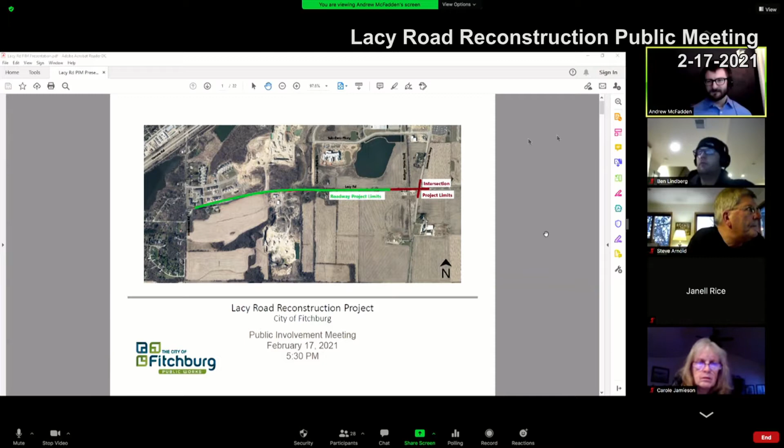So this is the Lacy Road Reconstruction Project. I'll give you a quick agenda: we're going to be talking about the limits, the need for the project, goals and schedule, and then we'll work through the layouts, typical cross sections, and go down the corridor to give you a flavor of the specifics of the corridor design to date. Then we'll give you information about the project website and how to give us feedback.

Originally, through the CIP process, this project was slated as one. We moved up the intersection project and the Lacy roadway project, all the way up to but not including Fitchrona, to be constructed next year in summer 2022, and we're currently working on the design for that. I won't really be talking about the Fitchrona intersection project tonight; that'll wait until 2023 design and 2024 construction.

If you have questions related to that, feel free to voice them, but we're going to be mainly focused on the roadway project, which is a little bit more than a mile long, and the intersection project, which includes Seminole Highway and the Badger State Trail.

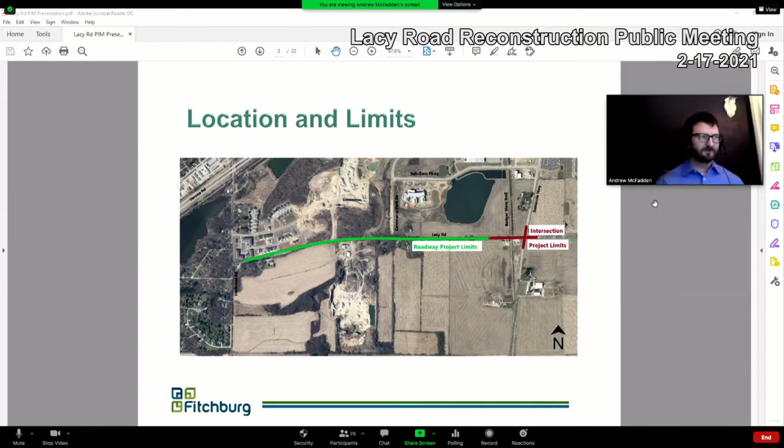So what was the need for the project? Why improve Lacy Road? There were existing long-term operational safety needs that need to be addressed. We also wanted to accommodate city growth and redevelopment along the corridor, and there were some discontinuous pedestrian and bicycle accommodations we wanted to fix.

The vertical and horizontal curves along the roadway didn't meet adequate sight distance for the 50-mile-an-hour road it previously was. The final design will bring the roadway curve down a little, tapering off some of those horizontal curves, and in the end lower the speed limit to 35 to make these safer so you can actually see over the curve and spot an obstacle in your way. That was one big part of the project.

In terms of the project vicinity growth, there's a lot of development around this area - the Quarry Vista, Stoner Prairie neighborhoods, other proposed development, and new industrial park development. So we want to make sure we're accommodating that and urbanizing the corridor to accommodate the future growth.

From the discontinuous pedestrian and bicycle accommodations, as you can see here, there are a lot of great facilities: the Military Ridge Trail, the Badger State Trail, some on-street bike lanes, a path adjacent to Rock Ridge, but not really anything connecting the two.

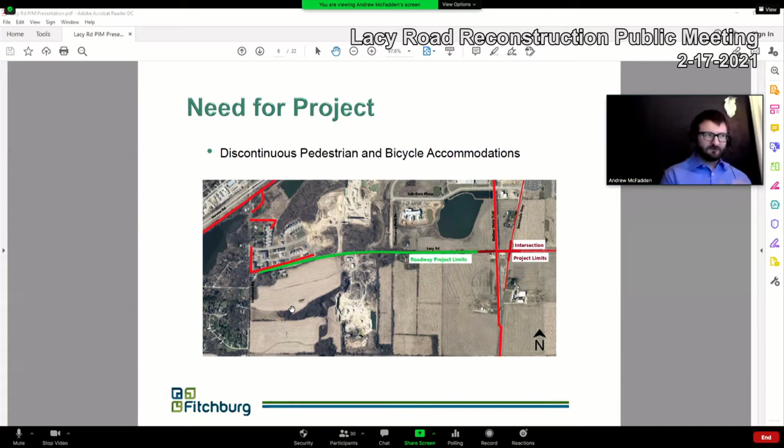This project is really slated to provide potentially that connection between these two areas for pedestrians and bicyclists, as I'll demonstrate here. So with the project goals, to do that, we're going to continue that multi-use path.

We've proposed a 10-foot path along the north side of Lacy Road, and we'll also be installing buffered bike lanes along both sides of the road. As part of the intersection project near Seminole, we're looking at enhancing that crossing treatment for the Badger State Trail.

Along with the intersection project, we're looking at increasing the intersection capacity to withstand the increased traffic volumes for the next 25 to 35 years, and looking to accommodate that future growth.

We also look to treat the stormwater. We have two basins in this project, an east and a west, and we wanted to build and extend our facilities to be able to treat that water before it gets into the kettle or the other basins.

Additionally, we really want to try to minimize our right-of-way acquisition and the impacts to neighboring properties, and keep our footprint as small as possible and minimize the impacts to the corridor during construction. So just to give you a quick overview of where we're at.

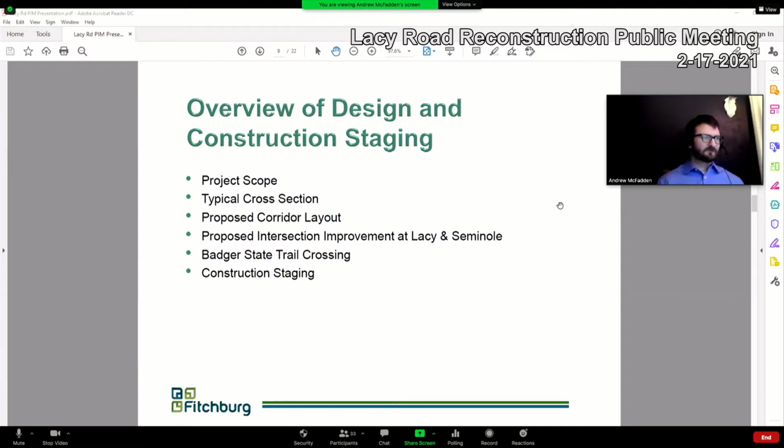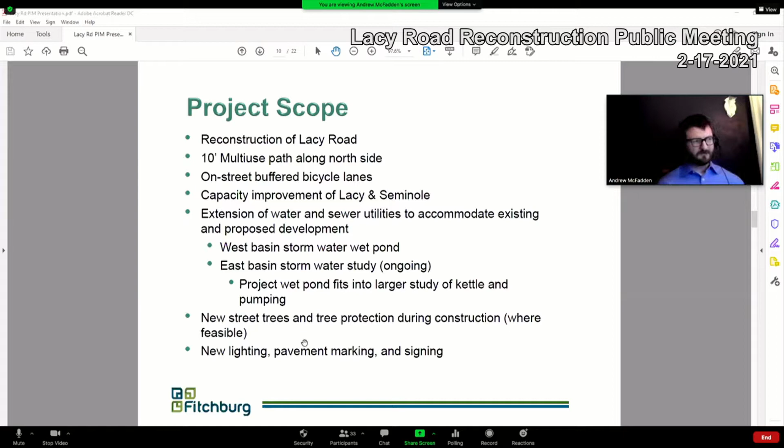As I said, a 10-foot multi-use path on the north side, on-street buffered bike lanes, capacity improvements at Seminole. We have two wet ponds we're looking to put in, one for each basin, and we're extending the water and sewer utilities to accommodate the existing and proposed development. We're also adding street trees and providing street tree protection during construction where feasible, plus new lighting, pavement markings, and signing along the whole corridor.

Along with that, we have a couple different kinds of sections. We have some portions of the corridor where we'll be providing medians, shown below. So let's walk through the elements.

Starting on the south side, we have a 5-foot sidewalk, an amenity terrace or amenity zone, buffered bike lanes, 12-foot travel lanes, the median, and then the inverse on the other side with a terrace and a 10-foot bike path.

We also have some areas of the corridor where we won't be putting in medians, shown here, where we'll be narrowing it down.

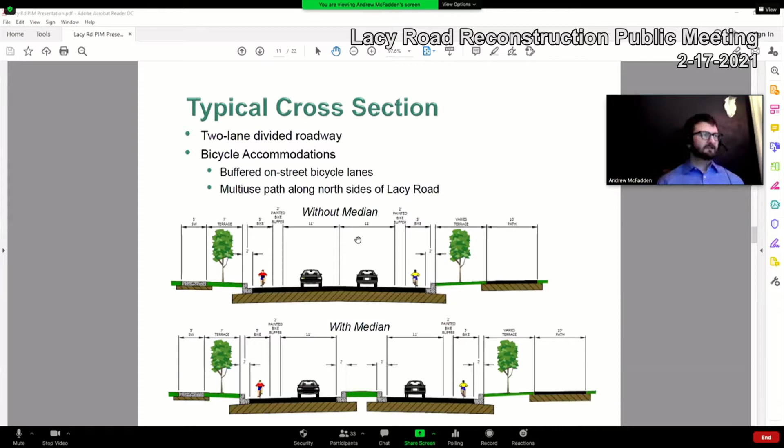Just zooming in on this—we'll be putting all of this up on the website. I know this is a lot of information, but feel free to dive into it more if you have specific comments on it.

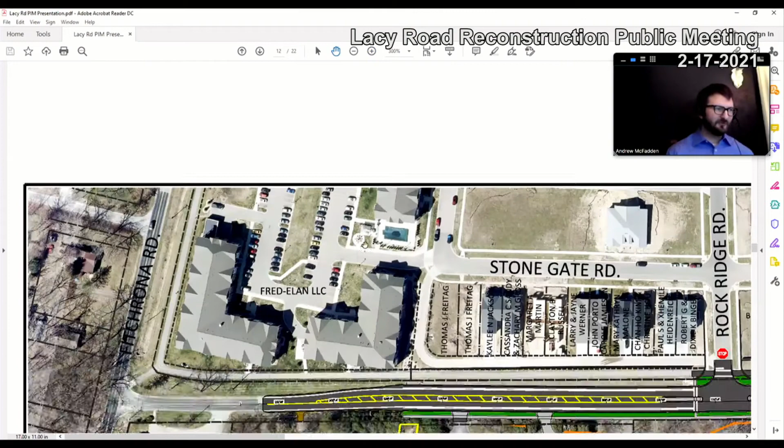Starting on the western side, as I noted, the project does not include Fitchrona Road. We start roughly 250 feet east of Fitchrona Road, so we'll match the existing cross section there, and then we'll widen.

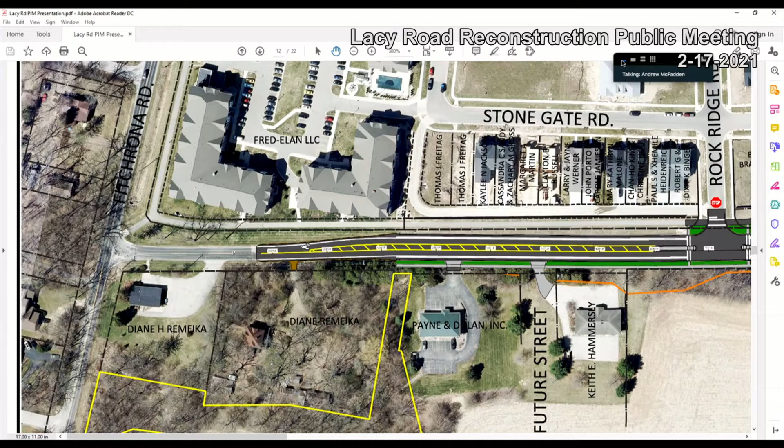I'll give you a quick lay of the land. This orange line is the temporary limited easement, where we're looking at potentially grading just during construction, but that would be done after that. The yellow is for our wet ponds—those would be the permanent limited easement. And then we also have some pink where we have proposed new right-of-way, and then existing right-of-way with the property line.

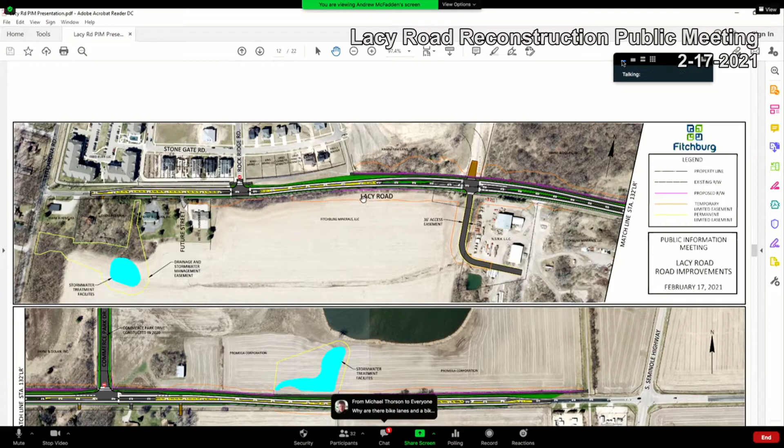So I'll just walk from west to east, looking through some of the key features. Don't worry, we'll come back to this—I'm sure you'll have lots of specific questions. As you can tell, walking along, we'll be putting in curb and gutter along the whole corridor.

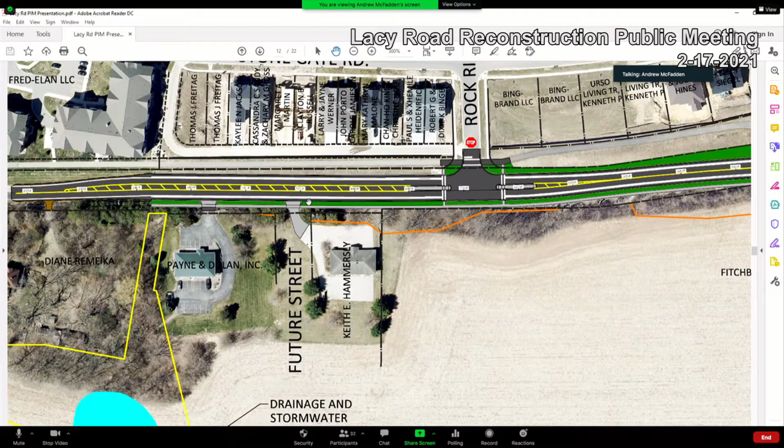Reconstructing driveways, with stop controlled intersections here at Rock Ridge. Moving further east, we'll be putting in driveways with access easements as necessary.

Here's a flavor of what the medians would look like. We'll try to incorporate grass as much as possible.

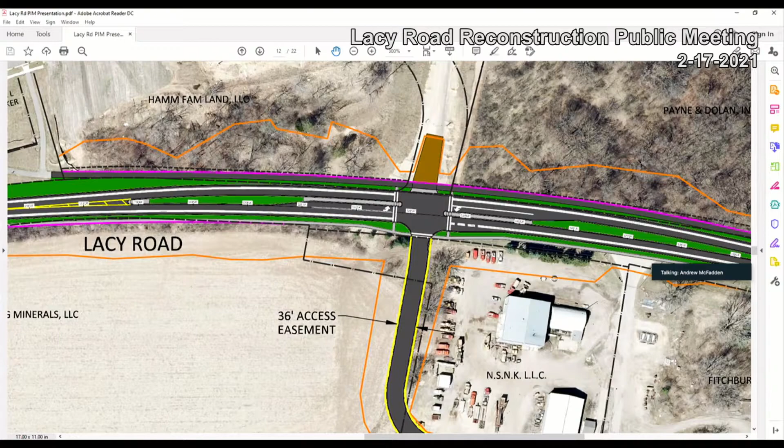Working further east, we'll move down here. This is the connection with Commerce Park Drive that will be completed as part of this project. Just going to buffer, sorry.

It's a big file, I appreciate the time it took to get all the line layers on this. So, zooming in just a little bit.

Again, reconstructing these driveways. This is a median section with a right turn into Commerce Park Drive. This is the eastern stormwater facility, the wet pond.

We do have some left turns proposed into a future property that could be going in here. That's kind of to be determined, but we have that flexibility baked into the design.

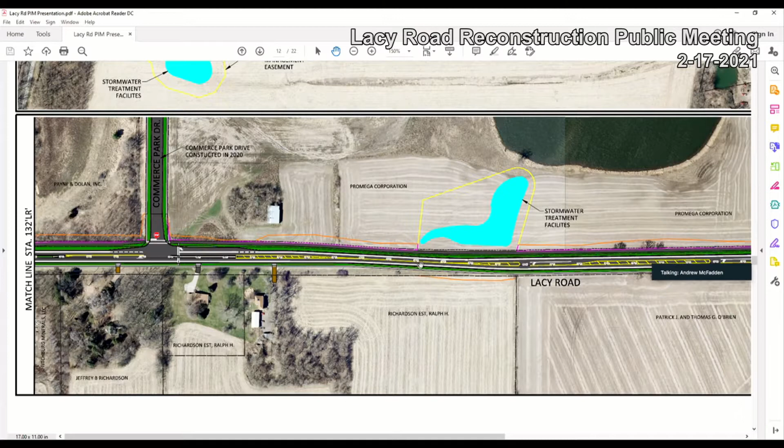You can see it goes from this median section down to kind of a 2-lane cross section, and then back. As we get closer to the Badger State Trail, you'll see the design taper off.

I just want to clarify these are two separate design projects currently. As I mentioned, these all started as one. Now they've become 3 different projects, and these two have been designed separately, but we are starting a design of where this project ends through this intersection, including the legs of this intersection. Note that it does say it dies off here, but we will be continuing through here.

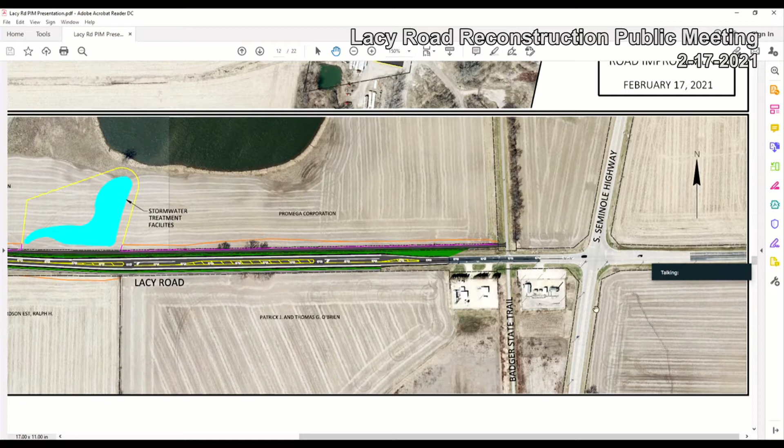Part of the reason we want to know your feedback is on what intersection control we want to look at. You can see it dies off a little bit there, but that won't be the final construction. We will continue through the Badger State Trail and through Seminole Highway. So with that, I'll just continue on.

Along those lines, I'll give you a quick synopsis of what the existing conditions look like out there on Lacy Road.

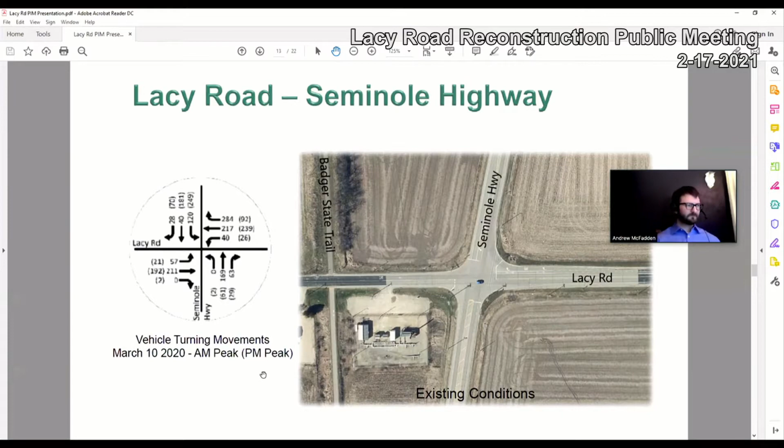To the left of the screen, you'll see the turning movement counts. We took these back in March, when school was still in session, and you can see the AM peak and PM peak represented in the parentheses. For the most part, we have some through traffic on Lacy, and also movement both from Lacy to Seminole and Seminole to Lacy, and similarly some northbound southbound traffic as well. That's the existing conditions in terms of the turning movements.

We have 2 alternatives right now to propose. Right now it's an all-way stop. We would be proposing either a traffic signal or a roundabout at this intersection. It is very close to the Badger State Trail, and it would certainly be a design accommodation of how do we integrate that.

In both options, we could certainly talk about putting in a median refuge island, additional signing and marking, and make it a more enhanced crossing than it currently is. But just running through the options.

With the traffic signal, we'd be talking about left turn lanes in all directions, a right turn lane to facilitate the westbound and northbound right turn movement. The estimated cost is roughly $1.89 million with right-of-way acquisition, and then there is some annual maintenance from the electrical and maintenance needs if things don't work on it.

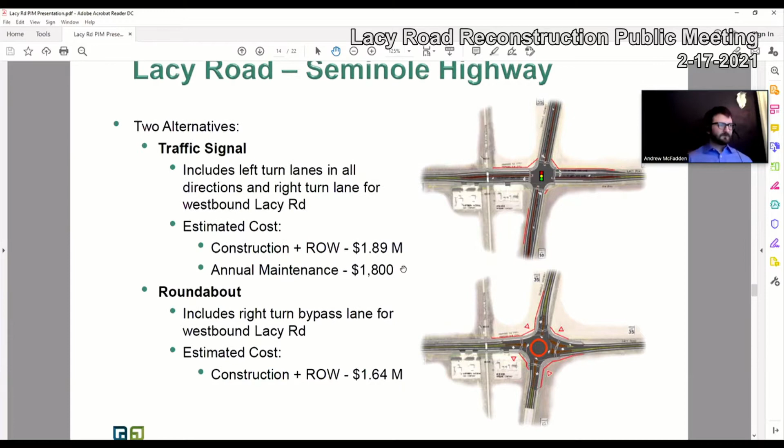For the roundabout, we're including a bypass lane for the westbound and northbound movement in order to facilitate that movement better. The construction cost with right-of-way is roughly $1.64 million. So that gives you an understanding of generally what they are.

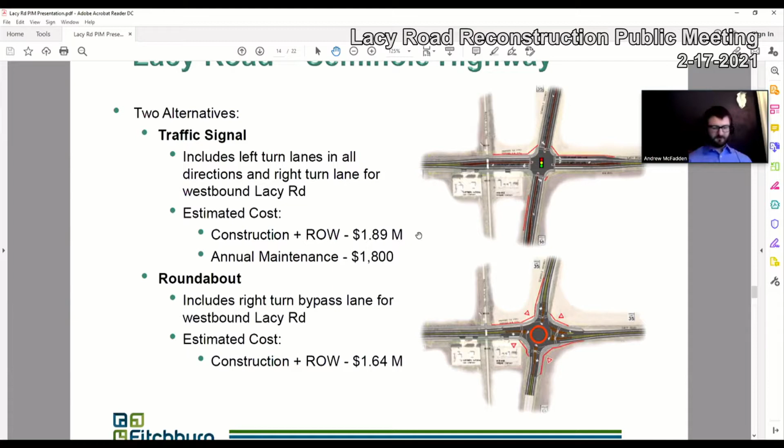Just to run through quickly with existing volumes, what level of service and traffic operations we'd see there: they all function, even the existing all-way stop control, functioning acceptably with a level of service C, A, and A in AM and PM peak periods under existing volumes. There's a lot of data here, but for the most part we're just looking at overall intersection level of service, and that performs well for all of them.

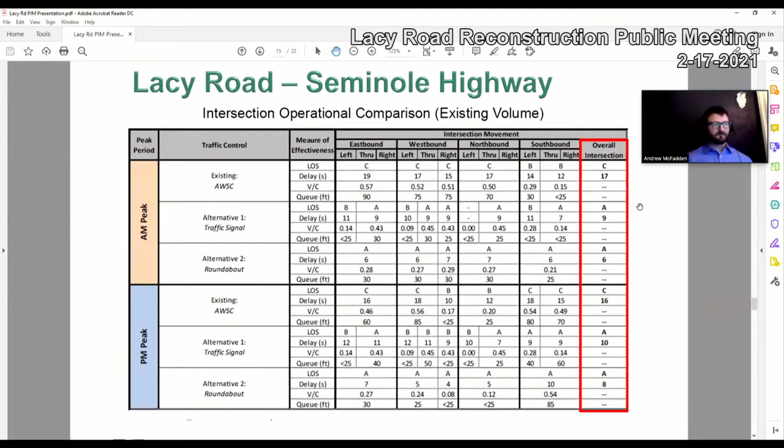But we also want to be cognizant of what volumes are going to come here. So the consultant provided some sensitivity analysis to give us an understanding of what additional capacity, what kind of spare capacity, each of these intersection configurations have. The higher number, the better. In this case, if we boil it down to a 2% growth rate, we'd be seeing roughly 15 years of it working as an all-way stop, 25 years as a roundabout, and 35 years as a traffic signal.

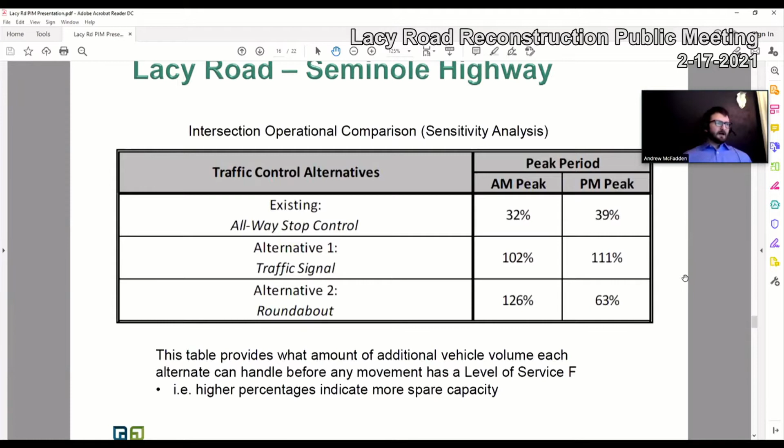So that can give you a general understanding of how long we're talking about, and that's again assuming a 2% growth rate with compounding, which is consistent with this area's increased land use and that sort of thing. So this is all to say that it definitely works for the foreseeable future.

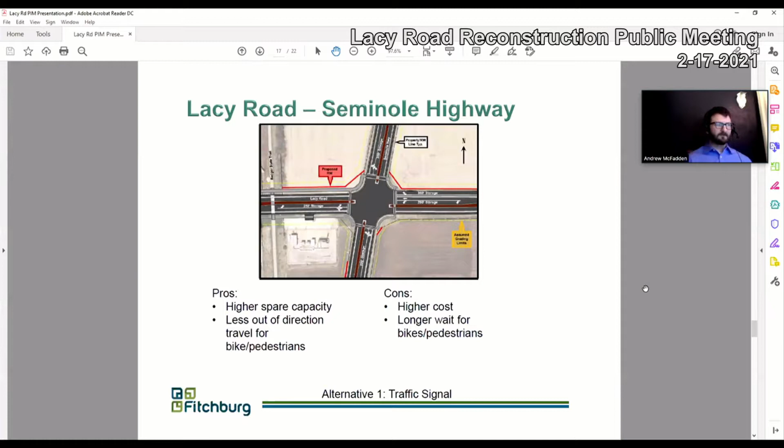In both alternatives. And this gives you some pros and cons. There's definitely higher spare capacity with the traffic signal. On the pro side, there's less out-of-direction travel for bikes and peds, but it is higher cost, and there could be some longer wait times for bikes and peds. We'd assume this wouldn't be coordinated since there aren't signals around it, so it would be relatively quick, but people would have to stop versus a more yield condition in the roundabout.

With the roundabout, we're talking about lower cost. Bikes and pedestrians cross one leg at a time, one direction of travel at a time, and there's lowered right-angle collisions, since everybody has to yield. So we might see increased fender benders, but we wouldn't see that right-angle, two vehicles at high speed, intersecting each other.

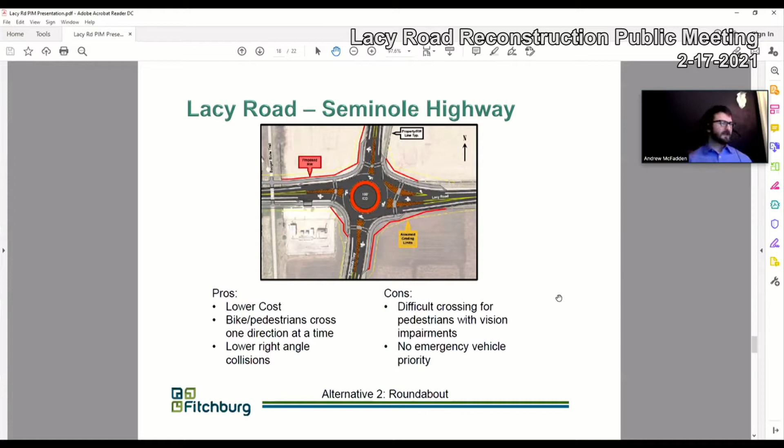For some of the cons, it would be difficult for pedestrians with vision impairment to judge a gap, and there is no emergency vehicle priority or preemption like what a signal could do. So that gives you a sense of how the two alternatives compare to each other.

Along with that, we're looking at an enhanced crossing, as I mentioned, of the Badger State Trail. In either option, we could certainly consider extending this median island through the trail, signing, marking, potentially an RRFB that could certainly be accommodated with these.

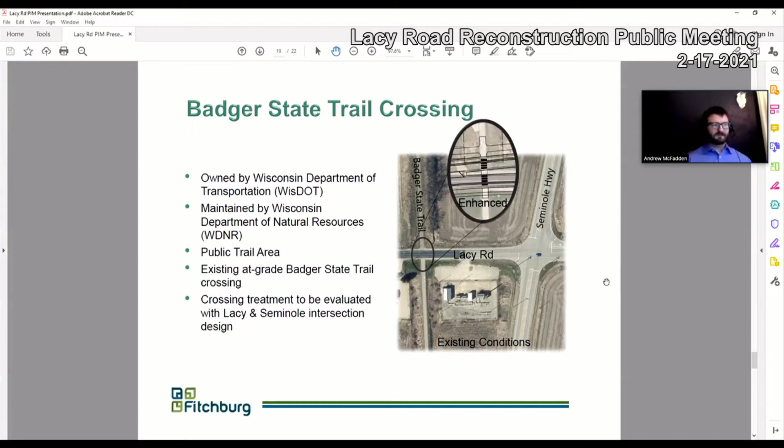Traffic control options at Seminole, and just running down: it's owned by WisDOT, maintained by DNR. It's a public trail area, and it's existing at grade. We aren't looking at doing grade separation at this time, and it would certainly be evaluated as part of that larger effort. So if you have feedback on that crossing specifically, feel free to let us know, and we'll take that into consideration with design.

So with that, right now the plan with both projects, and this is kind of why we want to package them together from a construction standpoint, is we're planning on fully closing Lacy to through traffic during the project in summer of 2022, and also closing the intersection of Lacy and Seminole during that time. The thought being that if we can close it all, we don't have to do construction staging, which is going to lower the full closure time, save the city some money, and save residents some headache from extending that traffic closure longer.

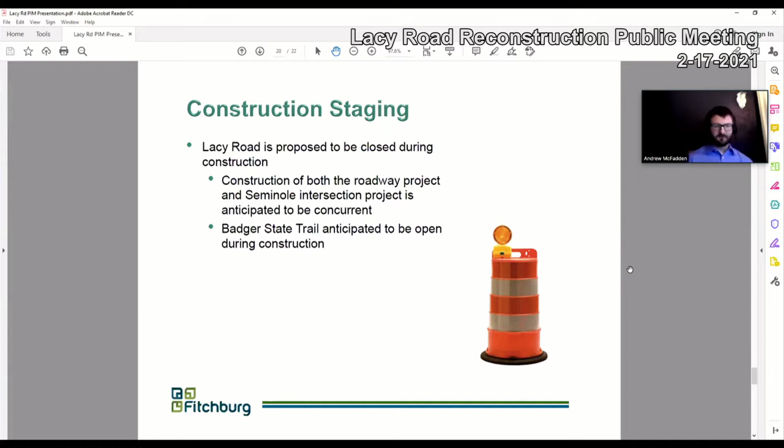We would certainly be accommodating for local access and for residents. And then I want to open up to questions and let everybody know that if you don't get a chance to fully get an answer to your question today, I'm happy to field emails. We have a survey on the website, which gives us a little bit more specifics, some drop-downs and stuff.

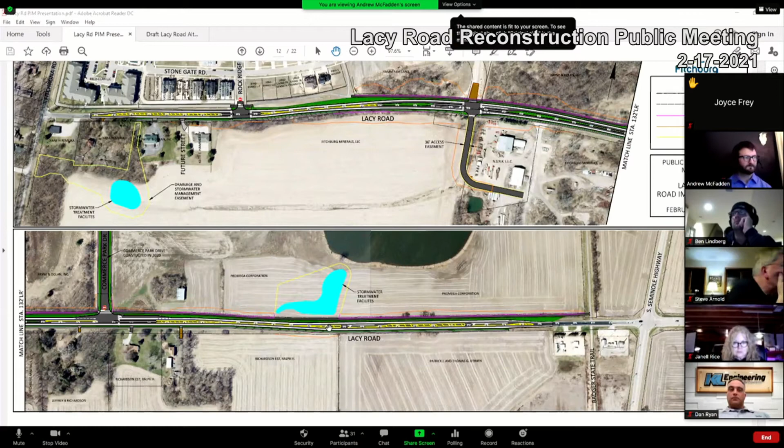The east side will go down to a facility outside of that, right on the screen there, outside the existing closed depression wetland that's all water. So the idea is to treat the water before it gets into that closed depression. I know the city has a study ongoing right now as to what that might function as in the future.

And then on the west side, we're creating a new stormwater practice south of Lacy and Fitchrona that will be able to handle that water coming down from Commerce Park Drive to the west. And that water goes northbound on Fitchrona - is that correct? Yep, it'll be treated per the requirements, and then it'll drain to Fitchrona and drain to the north from there. Does that help, Sue?

And Sue, just as a definition, a kettle is just a depression. So when Andrew referred to a kettle, he means that closed depression that Ryan referred to, that we can see right there. So that's a kettle or closed depression. Does that help? There's a lot of kettles in the area, so I wanted to make sure I knew which kettle we were talking about. That makes sense, thank you. Thanks, Sue.

Any other questions? I'll look around - I see Steve, you got one. I'll come back to you, Steve, I want to get a few other folks involved first. Diane, I see your hand up. And Diane, before you jump in, if anybody has any comments they want to put in chat, I'm happy to read those off as well if your camera's shut.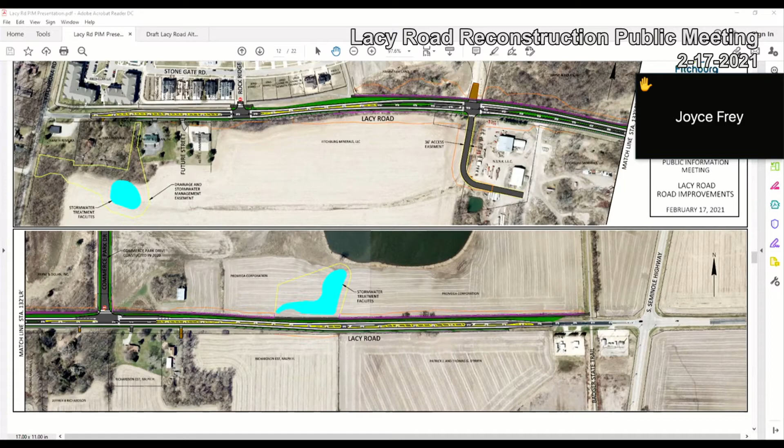Andrew, it's Joyce, can you hear me? Hi, Joyce, yep. Hey, there's a couple questions in the chat - I don't know if you noticed that or not. Yeah, okay. I don't know, okay, yep. Diane, did you have trouble? I saw your hand raised, but I didn't get a chance to hear you. And you're on mute still, so I don't know if that's holding you up.

We did get a question. Yeah, thanks, Joyce, for pointing that out. We did get a question: why are there bike lanes and a bike path?

That's a good question. It's certainly something that's coming up in a number of projects. I like to explain it as there being different types of users. Some might prefer to bike on the roadway and be more confident, while others might not, depending upon where you're coming from and going to. If you're going from a trail to a trail, that's definitely a very comfortable path on the north side, but that doesn't work for everybody if you're making turns and that sort of thing. So we want to make sure we're accommodating that right of way to bicycle for all those different groups of bicyclists. Hopefully that helps, and Michael, if you have any follow up, feel free to let me know.

I asked the question because there aren't a lot of bikes that go down that road right now. It's high speed and not really bike amenable. And if we're paying extra as a city to get a bigger right of way, why would we do that if we already have a bike path? But six and one, half dozen the other, it's not a big deal.

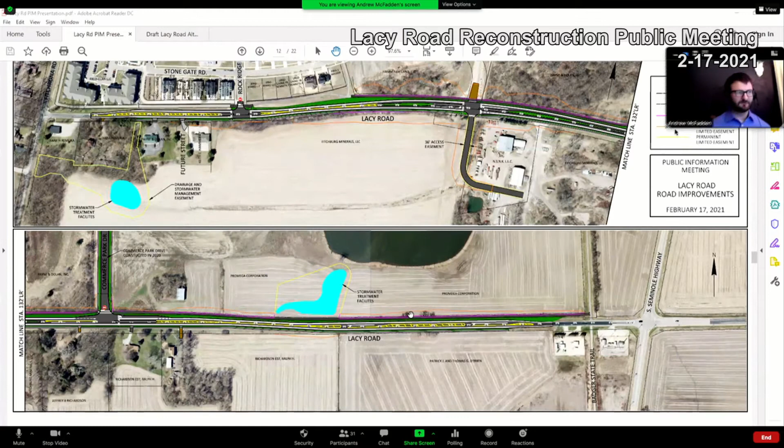Yeah, currently our temporary easement goes behind those, so we would likely be grading by them. I can't say for sure those would be removed, so we'll have to talk more about the specifics. Ryan, if you want to jump in with any additional knowledge, but otherwise, to the extent we can, I can't promise one way or another at this time. Okay, bigger, sorry about that.

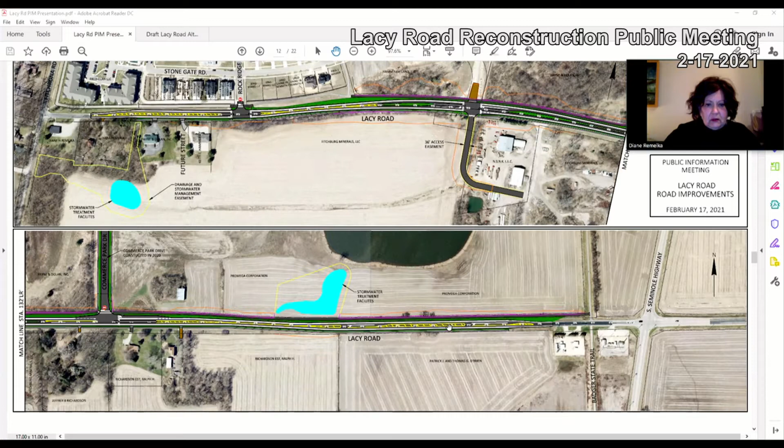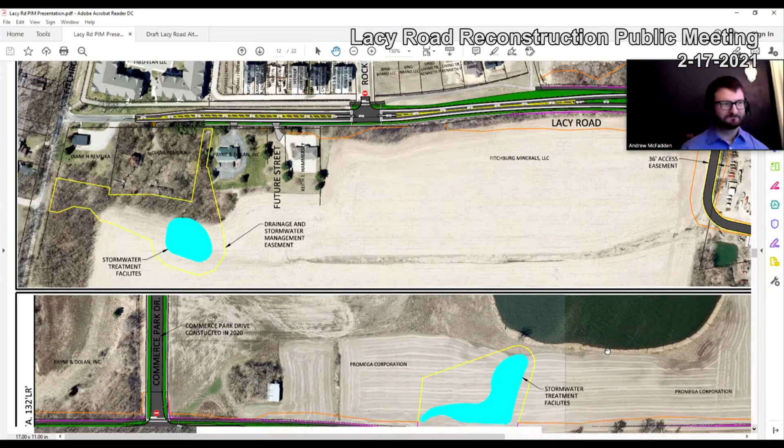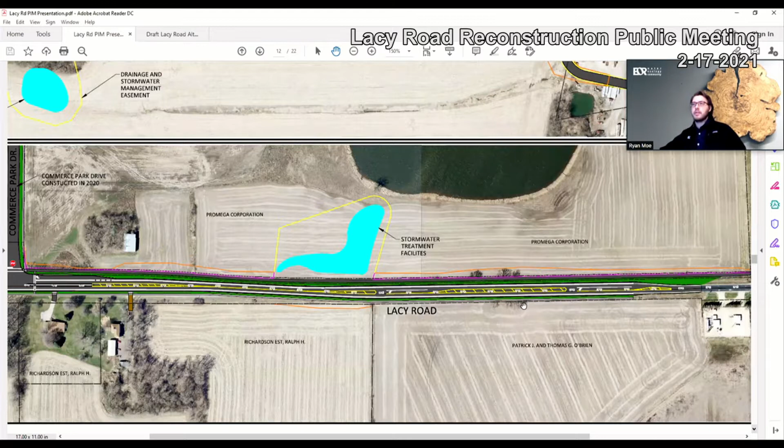Is there a possibility they can remain? Certainly on the south side, I think we have less slope to... sorry, I'm gonna freeze up my screen again. But I think on the south side we have more possibility for those to remain. But correct me if I'm wrong. Let's look here - I think with the width of the road, they're going to be bumping up pretty near them. Yeah, we can take a closer look to confirm that, though. So it might not be possible, but we'd definitely like to accommodate those if we could.

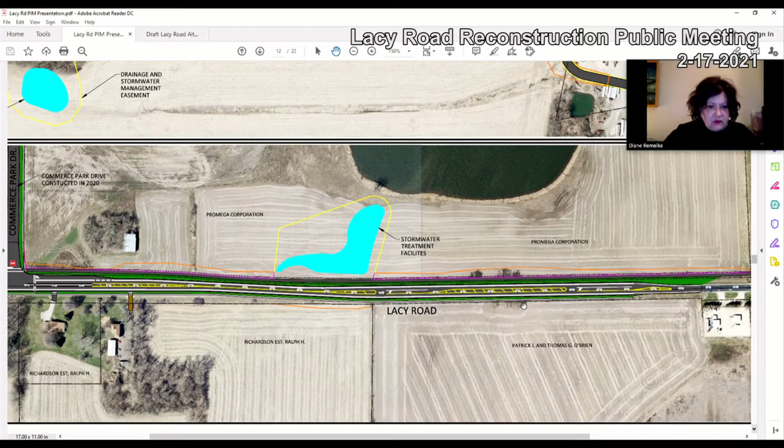I'm sorry, Ryan, any more feedback on the hill, at the top of the hill? I would just add that we're looking at having a steeper slope to minimize the impact as much as we can. We'll be looking at that closer too. Okay.